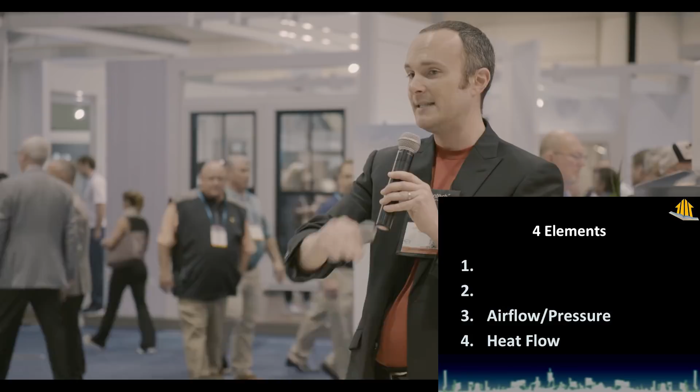So, people know about heat flow, they don't really get how it works, but that's okay, we can teach them later. Airflow and pressure. What trade is supposed to be the expert in airflow and pressure on a build team? HVAC. We have an expert in the room. Can you tell us whether most HVAC professionals are given the training and the equipment to test anything about the home as a system? No, and he very clearly, no. That is a very clear answer.

Yes, that is true. Most HVAC professionals are run ragged, just trying to do change-outs on boxes, and they're given very clear instructions to not waste a bunch of time thinking about how to fix the whole home. We need to change this because the HVAC guys are going to start getting the short end of the stick very soon. They take a lot of the blame.

Next on the list is moisture, and we are going to kill the house with moisture, or I'm going to make my wife's nose bleed. And either of those things is bad. If it's too dry, it's bad. If it's too wet, it's bad. So we need to be able to manage this. And also air quality. Now this list is going up in increasing importance. Number one thing on the list is air quality. If a home is super energy efficient, but it smells bad, who wants to live there? No one.

If a house has an indoor pool, who wants to live there? Awesome, I do, right? It's not about energy efficiency. I would not call myself an energy efficiency expert because, first of all, no one cares. None of my clients cares about energy efficiency. They might say that they do as a side effect, which is fine.

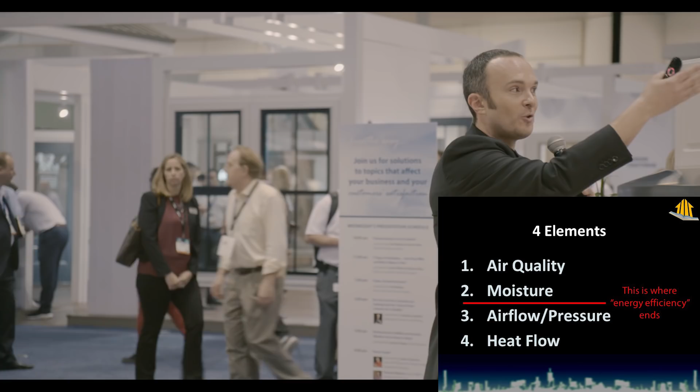We can deliver energy efficiency, and one of the wonderful things about a lot of these products is that they are energy efficient. But the better thing about these products is that they give us the ability to control air quality and moisture and airflow and pressure and heat flow. All of those things are what we need to care about. Now the energy codes are changing, and the energy codes only deal with energy efficiency. So if you are letting the energy codes govern your build, you will be creating air quality and moisture problems.

You will. Somebody like me only has to sit and wait for people to pick up the phone and find me and call me, because there will be way more problems as we go down the road as we're building more airtight, more insulated, and with an HVAC system that's supposed to be tuned, and maybe it's tuned or maybe it's not, with all the spray foam and the air tightness measures and everything that we're doing to houses.

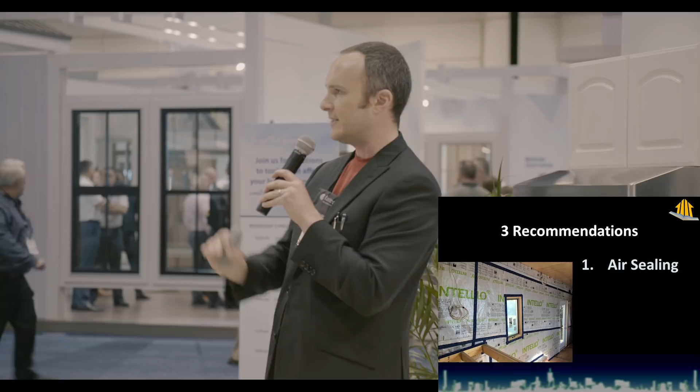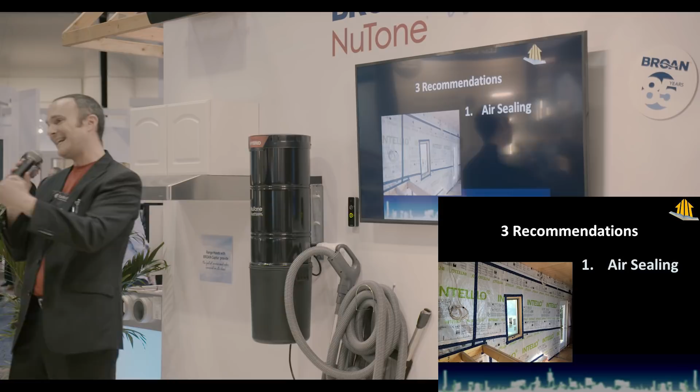So the three recommendations to make on any home, new or old, is number one, air sealing. Everything about my house that is awesome starts with the air tightness layer. Nothing about my house would work if I did not have this air sealing in place. Now you can see here that I have an inboard air tightness layer. I have a house wrap inside my walls. I also have one outside, and redundancy is very important.

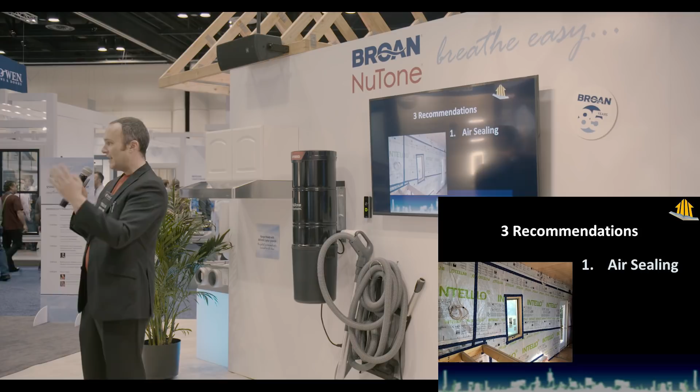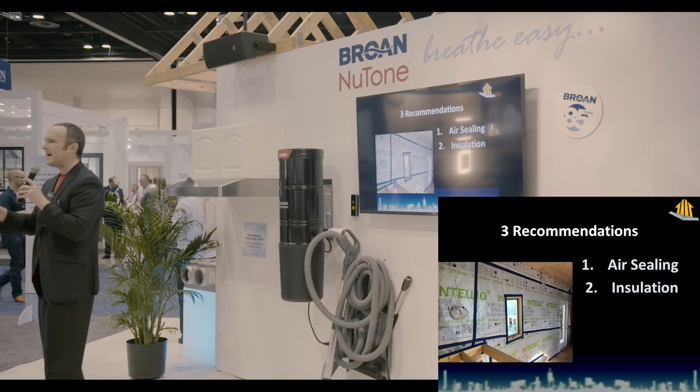You don't want to be too redundant and just waste a bunch of money on stuff, but it's a good idea to make sure that you have planes in place that will stop air from leaking into cavities or out of cavities that you don't want. Air sealing before insulation. Insulation is like air sealing, cheap, only needs to be done one time, doesn't draw any energy. Love it. If it's done right.

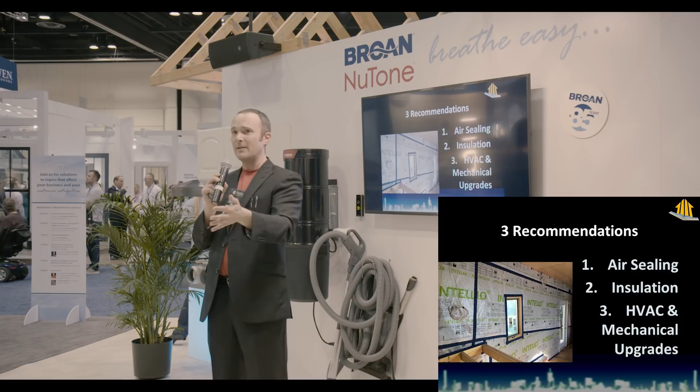And then after those two things are done, then and only then we can jump to what most Americans will jump to first, which is HVAC upgrades. If my house smells, it feels funny, it's too hot, too cold, I'm going to call the HVAC guy. HVAC guy has only been trained in HVAC and generally only in the box. They will look at the box and say, yeah, I think I can do something for you with this box, which has nothing to do with most of the problems that people are having, which have to do with air sealing and insulation. That's why we got to look at this home as a system thing.

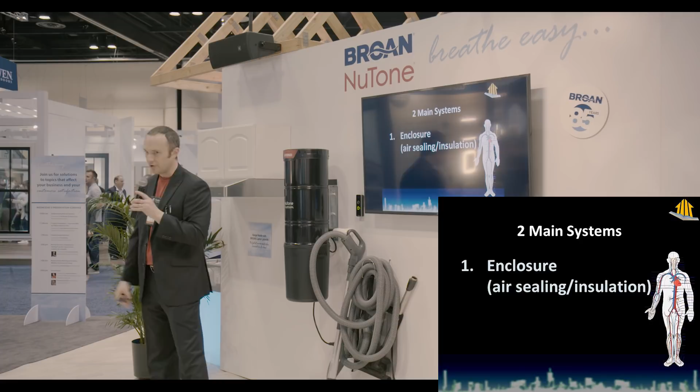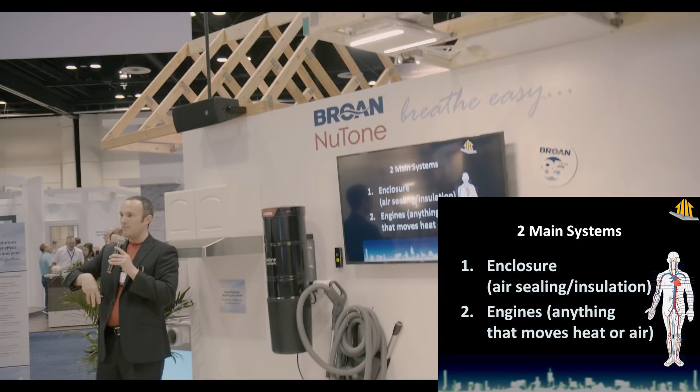Now, there are only two systems that are battling it out in this performance game. The first one is the skin of your house, that's the enclosure, the air sealing and insulation layer. The second thing is the circulatory system of the house, that's the engines, anything that moves heat or air within the house, and that includes everything in this booth. All of the airflow management devices, the exhaust fans, the supply fans, the filters, etc. All of that stuff is participating in this game.

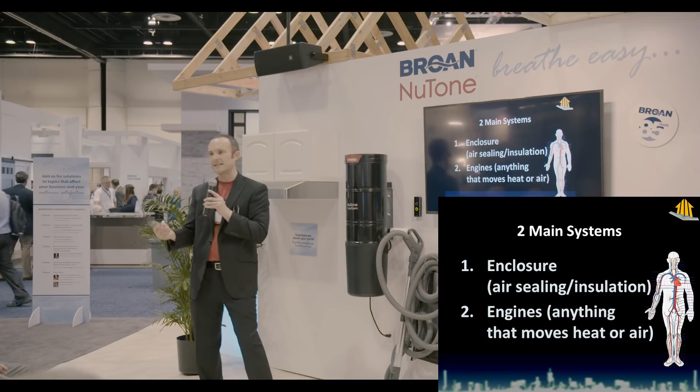Now, both of them have to be tuned. You have to have something like, for example, a duct design. If you're going to install one of these fans, you want to make sure that you do an equivalent duct length calculation so that you can know what diameter of duct you need to install for it. And also, you need to make sure that the two systems are tuned to each other. So the enclosure and the engines are tuned together. When you get that, you get the goal.

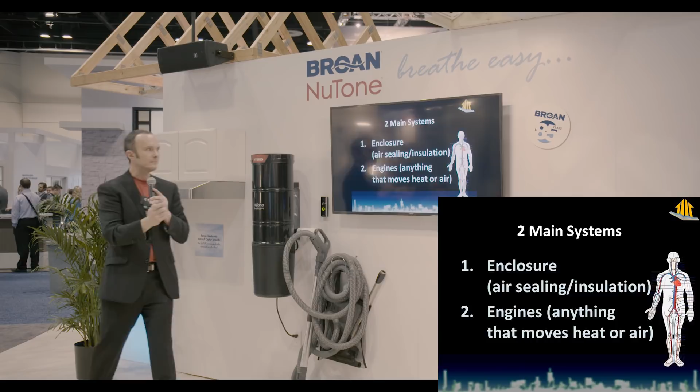My goal when I built the Tiny Lab was not energy efficiency. I think you already know that. It was also not sustainability, and it's not green, and it's not even comfort, which is the main thing that a lot of marketing departments are trying to push right now. But if you sit my wife and I, two people who live in the same house in the same family, down at a table, and you ask us what our ideal temperature is, will we give you the same number? No, we will not. So you're not going to make both of us more comfortable. You're going to make her more comfortable because she's more important.

And then if she leaves town, maybe I'll set the thermostat to my number. And I get that. So really what we're delivering to people is this: if you can give your clients control over their environment and prediction so that they know what's going to happen next week, next year, in 10 years. How much carbon monoxide would you like your babies to be breathing in 5 years? How much formaldehyde?

How cold would you like it to be in the basement in the wintertime? How hot would you like it to be in the top floor in the summertime versus the bottom floor? You can predict all of this stuff, and you can actually start guaranteeing your work for a very long time. In fact, Toyota builds modular homes in Japan, and they give a 60-year warranty for things like this. And they know for a fact they're not going to have to fulfill it because they do checklists and testing. They know exactly what's going on with their houses when they leave the factory.

So I built a tiny house on wheels, 210 square feet, in southern Florida. I drove it all over the country. We ended up in Death Valley, and it felt the same. It was the same temperature and relative humidity in every single place that we went to. Because we had things like an ERV. We had makeup air dampers installed under the kitchen hood. We had some filtration, but not too much filtration. We had insulation, the right amount, not too much, not too little. We had air sealing, supreme. So this is how you prove it.

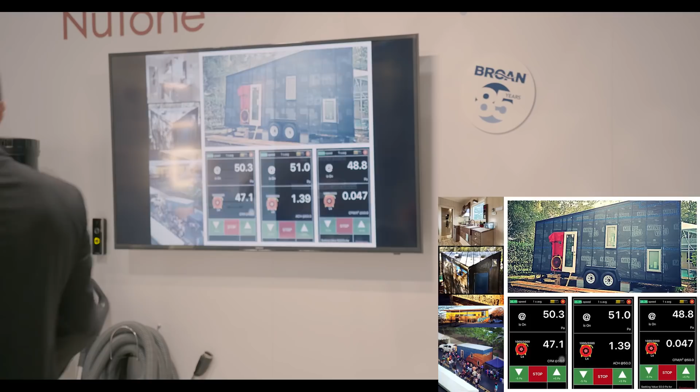Now, this is some of my test data. As you can see right here, first of all, I've got the Broan APE 130. You don't have to know what that is, but basically it's a nice square-edged exhaust hood over the stove, which is a gas stove. And then I have the makeup air unit right underneath this. You can see the damper that they've got over here, this mechanical damper that opens up. This is why this is so important.

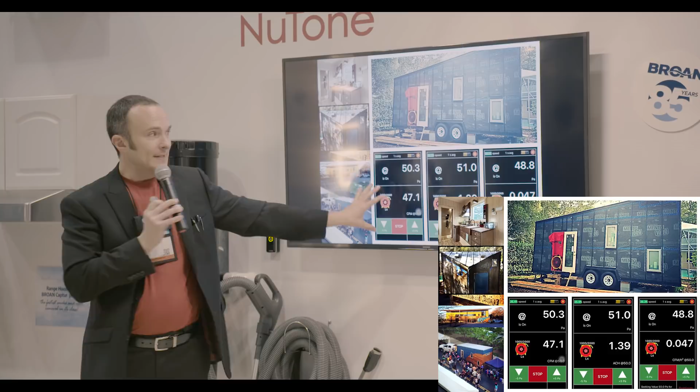This is my blower door test data while I was at rough-in. You can see my rain screen here. I got to 50 pascals, which is what you get every blower door test to in residential. When we were at 50 pascals, we had 47.1 CFM of leakage. You don't have to know technically what all this is about, but I want you to know what it means.

It means if I was to install a very nice, off-the-shelf 50 CFM bath fan in my bathroom, which is right up here, and run it every time I used the bathroom or took a shower, I would be doing a blower door test on my house. That is the blower door test number. That is the worst thing I could possibly do to this house.

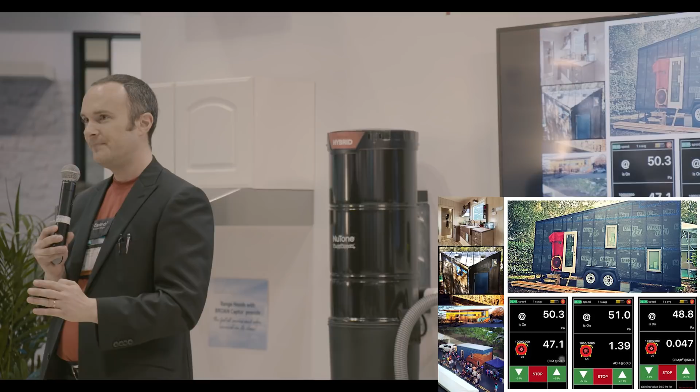And if you are building small, if you're building retirement communities, if you're building apartment buildings, etc., you need to pay attention to this, because if you're building really airtight, small little space, you turn on a fan, a 50 CFM fan will induce 50 pascals of back pressure. That means I will develop mold in my walls. I will get sued for it later, period. And my wife will get sick and my kids will get sick. So aside from all the legal stuff, it's like, do I build good or not? And I want to know exactly what these things are doing to my house.

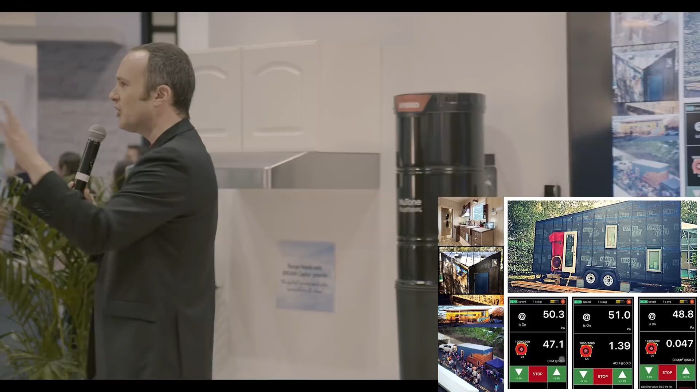This number right here is the air changes per hour. This is how you grade it in code, is air changes per hour. Now, 3 air changes per hour is the tightest that any builder in America is ever going to be required to build by code. I beat it by double. First time out, hi, I'm Corbett, I'm an idiot. I've never built a house before. Any builder can do better than this. So don't let anybody tell you that it's too expensive.

What really you're paying for in the extra air sealing is all of the complaining that the trades guys are doing, because they're doing something that they didn't have to do on any other house before. Once they've done their second or third house for you like this, there is no more complaining, there's no more expense. It actually is a really nice process.

I used tapes and membranes on my house because any spray foam in my house would have cracked, because I exposed my house to an earthquake and a hurricane on a regular basis. So the membranes and tapes are nice because I ended up stroking my house. I take the backing off the tape and I stroke the house, and I'm massaging and rubbing, and it's like a very beautiful Zen process.

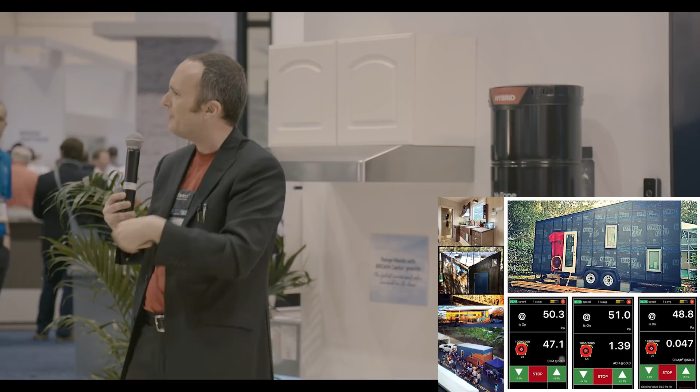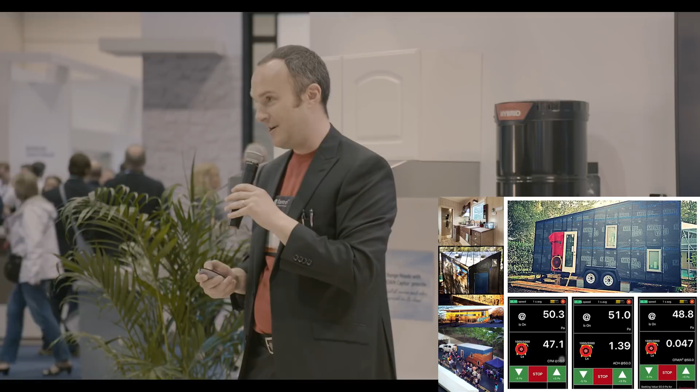I loved it. This last number right here is passive house airtightness. Again, first time home builder. Never tried this before. Passive house airtight. Passive house is the most strict building standard in the world. This is not rocket science. If I can do this, anyone at the show can do it better. Now, there are 5 simple tests that you can make sure that the air quality in your homes that you're building or that you're participating in is supreme.

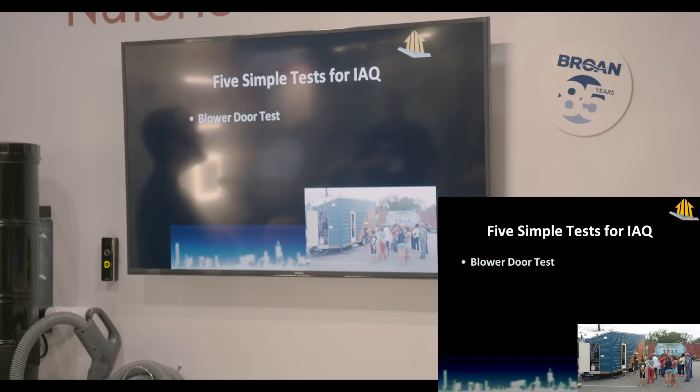First of all, blower door test. You have to. But there's another thing that you can do. You can do extra stuff. While you got the blower door test running, there are things like zonal pressure testing, which almost no one does, and I can find out whether a house that was just built, that even is Energy Star certified, is potentially a danger for a little family that's living in it

when the dad pulls in on a Friday night and he's driving his hybrid and he turns his car into park, but he doesn't turn it off because it's been a long week and he's tired, goes inside, car's still running, but silently because it's on battery, eats dinner, they all go upstairs, go to bed, battery runs down, car turns on, house fills up with carbon monoxide, no one wakes up in the morning. That's not a made-up story.

That actually will be happening in homes in every state of the country, because there needs to be airtightness layers in places, and people are doing crazier things with their houses, and they are less smart about homes in general than they used to be 50 years ago, right? We used to open a window when you turned on the exhaust fan in the kitchen, but now people don't know to do stuff like that. They used to know to open the flue in the fireplace, and now we get calls like, hey, my house is smelling with smoke, I don't know why. There's a flue in there, and you gotta turn up the damper.

So the blower door test will give you the ability to do all kinds of things within that test that are very valuable, aside from just the code compliance. Duct tightness test, not just when it's required by code. Code requires in every single state, within the next couple years at least, that you test duct tightness in all places where the ducts are outside the enclosure or not totally contained inside the enclosure.

The reason that this is really important is because I'm not caring about energy efficiency. I installed my duct system and I designed it to deliver a certain number of CFM and BTUs to each and every room. I want my bedroom that's at the end of the run to get cooled off in the summertime. If all of the air is leaking off inside the basement, that doesn't actually help my bedroom situation, right? Yes, it's energy efficient. I'm not losing the energy to outside, but it has nothing to do with the actual control, which is what we're really after.

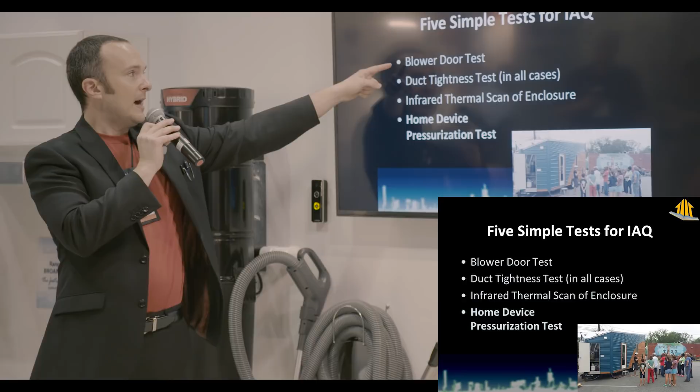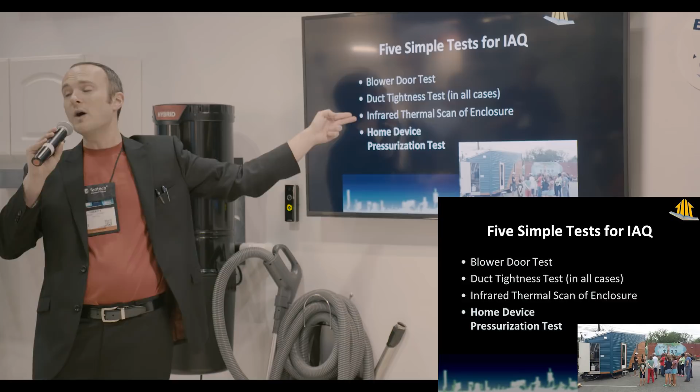If that happens, you will have condensation when temperatures get extreme, and temperatures are getting extreme pretty much everywhere, right? We've got global weirding going on and everybody's experiencing record temperatures on the high and the low end. And by the way, these are all easy. Required by law. This test, all the extra equipment that you need for zonal pressure testing is included in this kit. So whoever has a blower door test already has the ability to do zonal pressure testing. These you can get for as low as $200 on Amazon. No excuse not to have one in your pocket at all times.

Home device pressurization test. We're talking about turning on all of the very nice Broan exhaust fans that you've got in your house. Your ERV, that in my case moves 70 CFM on the high end, and it moves right now about 35 because I've dampered it down and put it on the low setting in my tiny lab. And the kitchen exhaust too. So you turn on everything and you see what the house does. And it's possible that you could run a blower door test in a house.

I actually had a billionaire client, and if you want to piss off a homeowner who will never go away, do it to a billionaire, who had 4 wood-burning fireplaces that he liked to burn. Anyone want to guess? He's a billionaire. Every night, all 4 burning for several hours at a time. Every day from 1 to 5, a professional chef comes in and prepares meals for that night and for the next day and runs that giant 1000 CFM hood on high because he's a professional chef. And they've got several dryers in the house, all of which run all day long because the maids are cleaning all the linens all the time, right?

And this poor HVAC guy went in and did what he always does, which is install beautiful top of the line equipment. He's got 2 ERVs in the house. None of the stuff worked at all because the HVAC guy did not understand what the enclosure was doing. The whole house was not tuned. The enclosure was great, HVAC system was great, but they did not match up to each other.

Last thing is exhaust fan flow test. Just because you have a beautiful piece of equipment, and what I'm, by the way, red flag telling normal Americans, is if you walk into a brand new house and you see a piece of equipment that has the name Broan on it, it means it's a pretty nice piece of equipment, for example, and you turn on that switch and you hear anything, it's probably ducted wrong, because these things are designed to be perfectly quiet now.